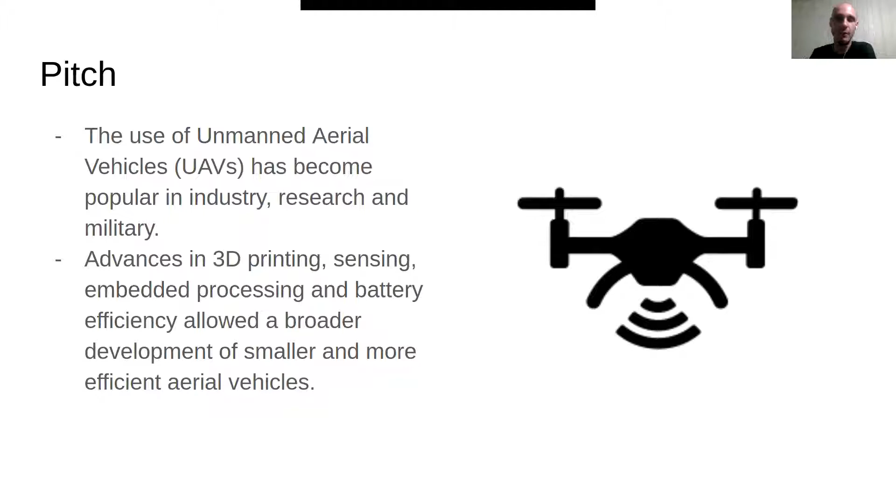The use of UAVs has become popular in industry, research, and military. Recent advances in 3D printing, sensing, embedded processing, and battery efficiency allowed a broader development of smaller and more efficient aerial vehicles. Nowadays, most UAVs are designed to operate in outdoor environments, being fitted and dependent on accurate GPS data feedback. They end up being often manually employed by some kind of external operator.

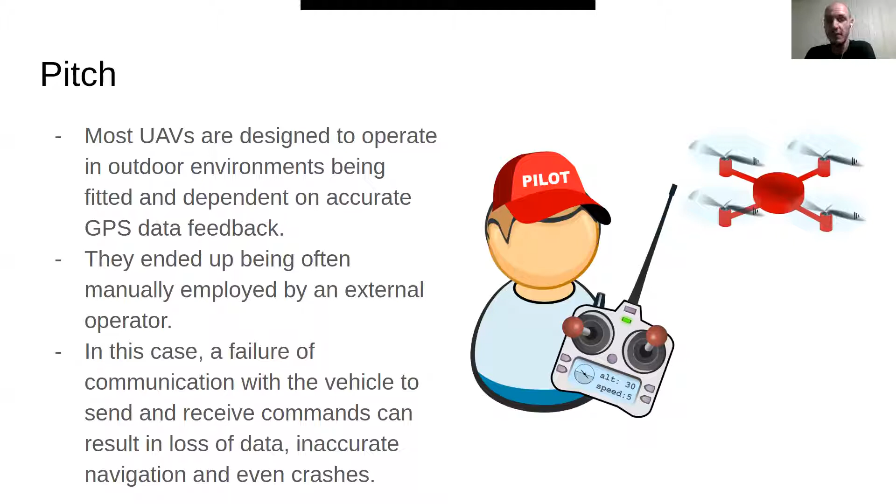In this case, a failure of communication with the vehicle to send or receive commands can result in loss of data, inaccurate navigation, and even possible crashes. In this work, we propose a visual-based UAV with embedded online intelligence capable to maintain stable flight, navigate, and locate itself in indoor environments. With our approach, there is no need for any external operator or any kind of offboard processing. We evaluate our vehicle in a real indoor environment that simulates an oil platform environment.

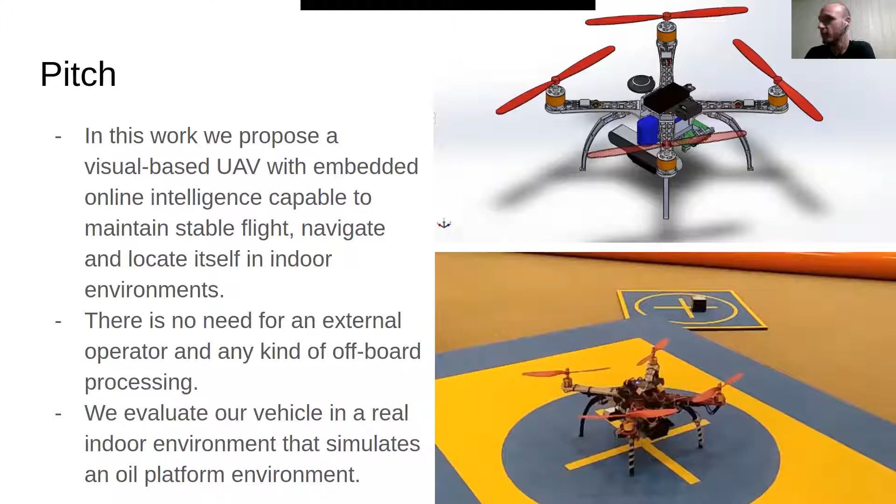So the figure in the upper right shows the vehicle in the modeling and design phase, and the figure in the down right shows the vehicle already deployed in the testing environment where we conducted the evaluation of our vehicle. The hardware setup: our vehicle was designed to have all processing embedded in it. The idea is to avoid any kind of use of external processing.

We used a quadrotor-based frame of 45 centimeters of diagonal. We use propellers of 10 inches and motors of 1000 kV. We used a Pixhawk flight controller as our main flight controller. We used the ZED stereo camera to perform the visual inertial odometry. With this camera, we get the visual pose, which we use as the main pose in our vehicle.

We also used a monocular camera to perform the detection. We put this camera pointed to the ground, so we could make all the detection of things in the ground. We also used the Jetson Nano as our onboard computer. So with this computer, we did all the processing embedded in our vehicle.

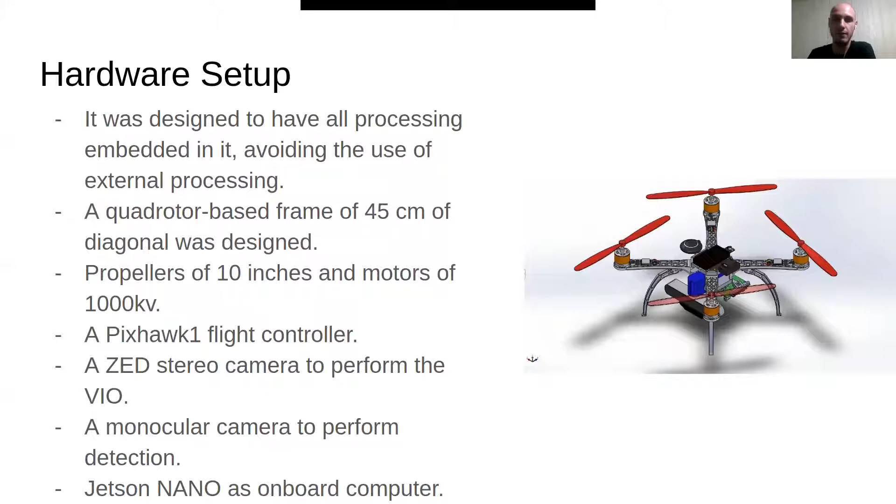The software setup: the first step of our software was to change the ArduPilot source code. ArduPilot is a framework for aerial vehicles. We compiled a firmware version of ArduPilot that uses visual pose instead of the GPS. By default, ArduCopter, that is the ArduPilot section for aerial vehicles, has the GPS feedback as the main information to define the pose. So we changed it to have the visual pose that we get from the ZED camera.

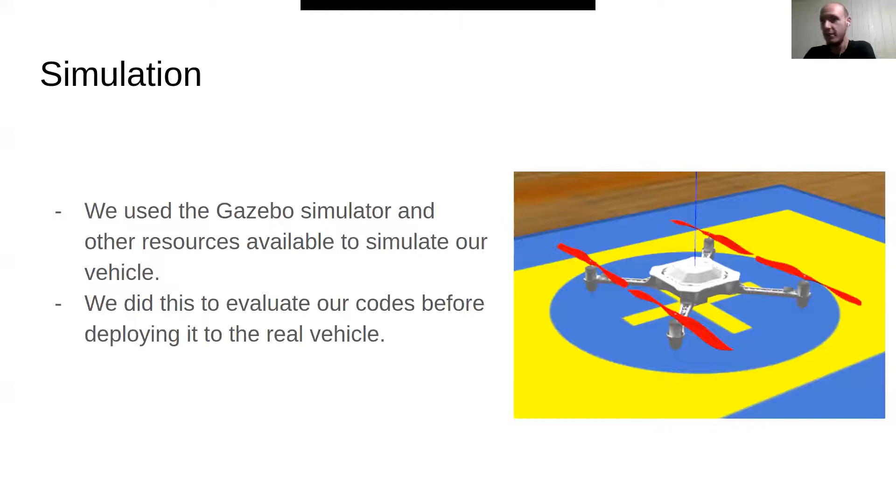We also use the Gazebo simulator and all other resources available to simulate our vehicle. The idea is that we could evaluate our code before deploying it to the vehicle, to have better results. So the figure in the right shows our vehicle in the simulated environment of the Gazebo simulator.

The testing environment: we tested our vehicle in an arena that simulates common tasks for UAVs of an oil platform. These tasks can be inspection, navigation, for example. This environment provides many challenges, like having to locate, navigate, read information from the scenario, among others. This test environment that we used, we also described it in simulation to test our vehicle. So the figure upper right shows the real testing scenario, and the figure down right shows the simulated environment in the Gazebo simulator.

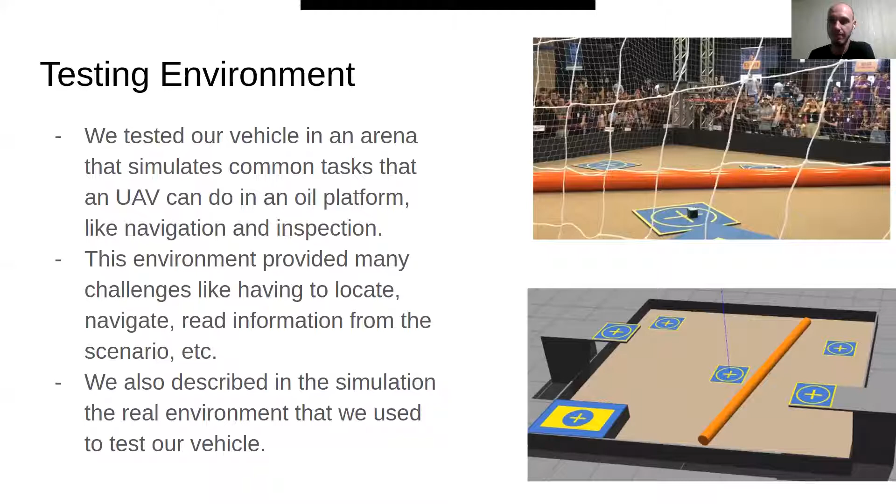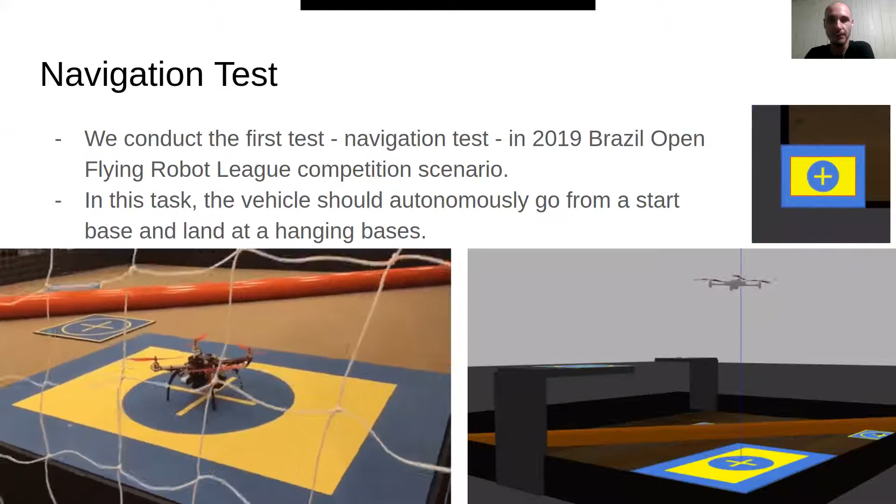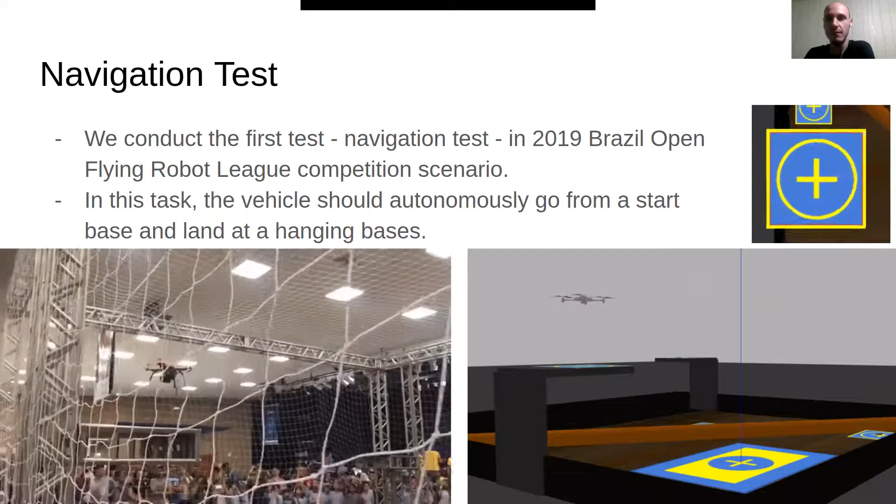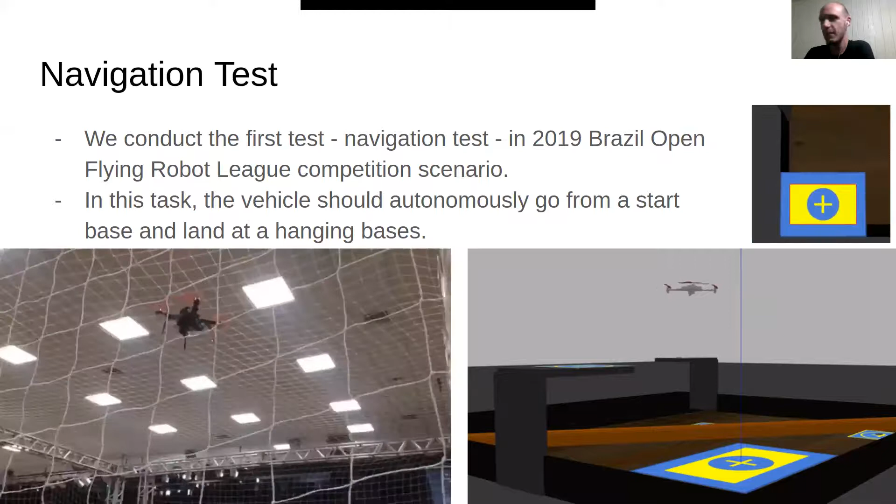We conducted 2 tests to evaluate our vehicle. The first test we called the navigation test. The idea in this test is that the vehicle should autonomously go from a starting base and land at a hanging base. This environment was the scenario of the 2019 Brazil Open Flying Robot League competition. So the GIF below in the left shows our vehicle in the real scenario performing this task. The vehicle should go from a start base in the ground to a hanging base. The figure down right shows the simulation of this test in the Gazebo simulator.

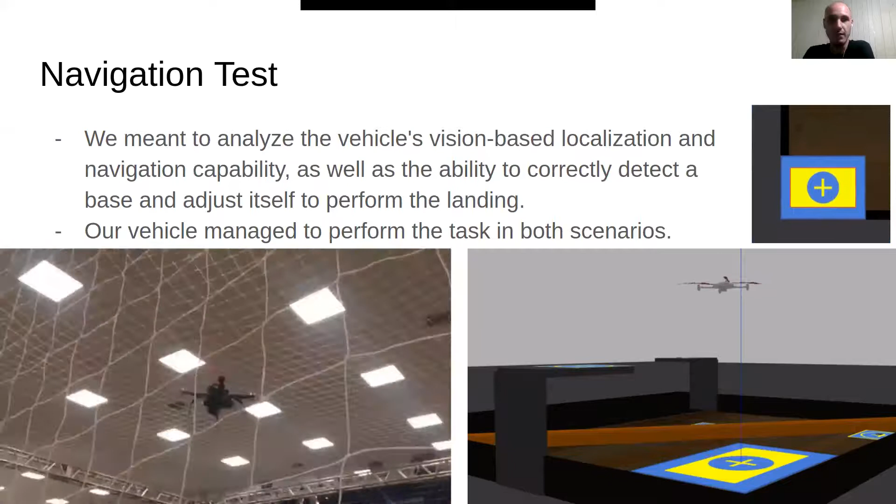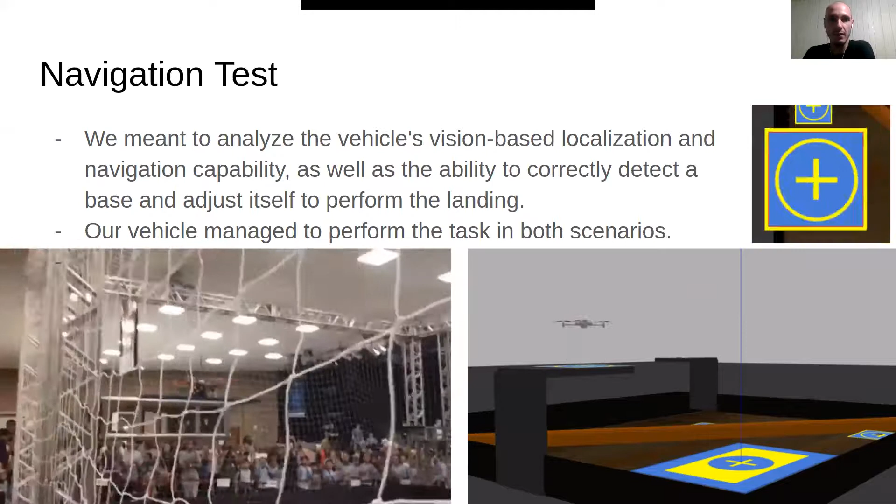The idea, like I said, is to analyze the vehicle's visual-based localization and navigation capabilities, as well as the ability to correctly detect a base and adjust itself to perform the landing. As you can see in the GIFs, our vehicle managed to perform this task in both scenarios.

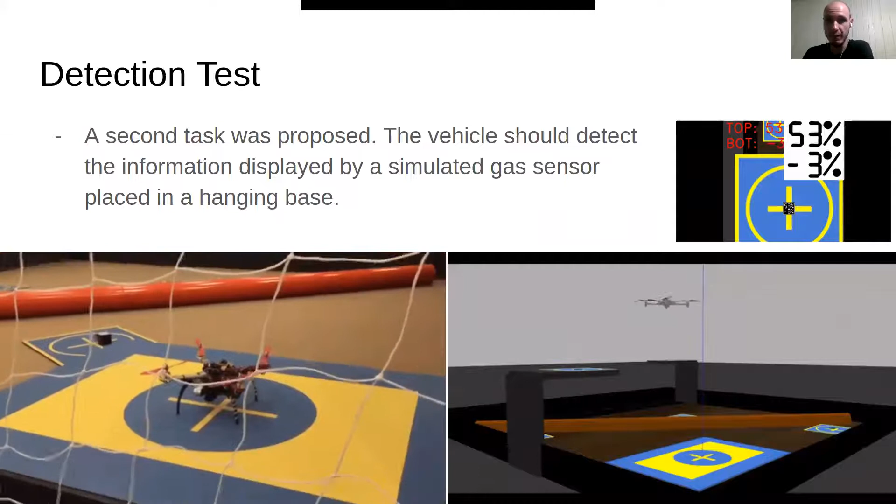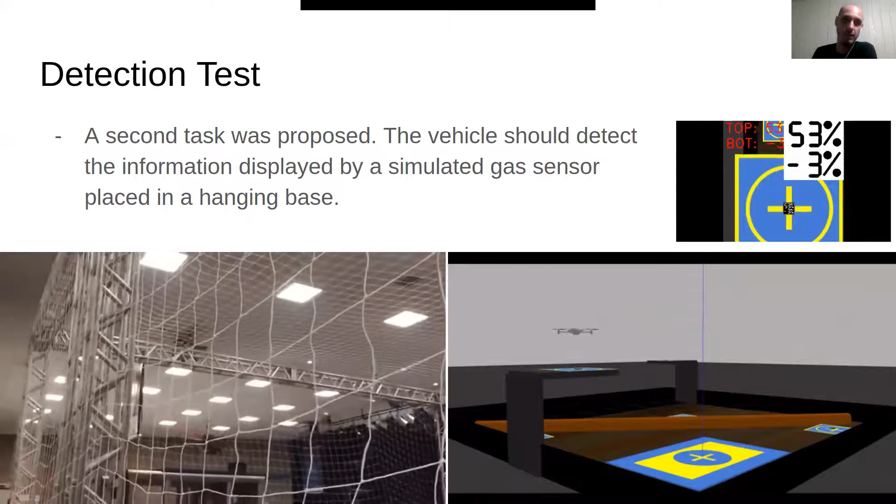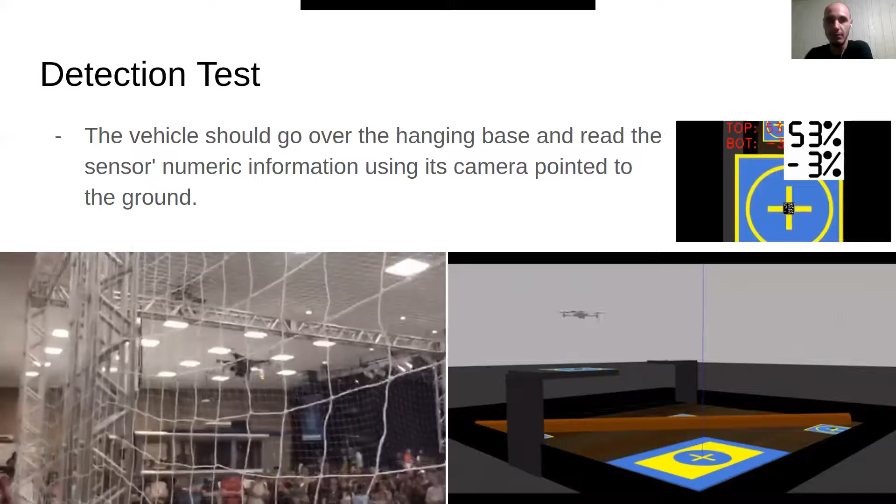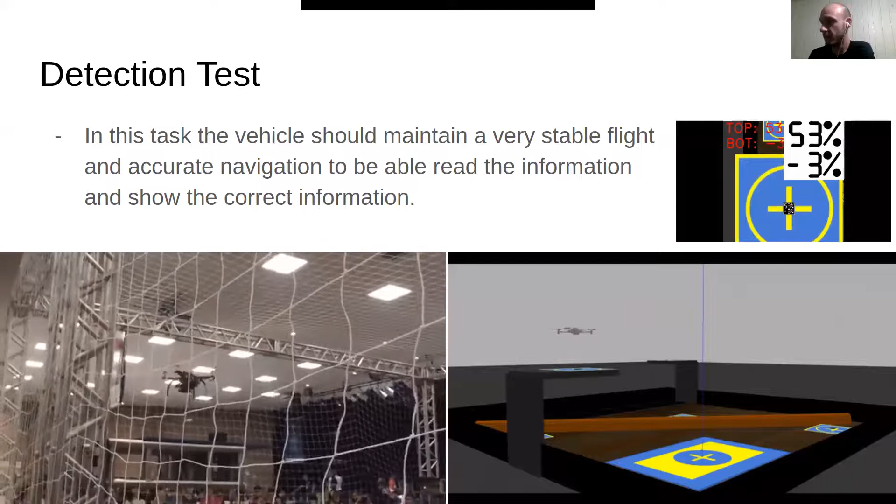We did the second test. In this test, the vehicle should detect the information displayed by a simulated gas sensor placed in a hanging base again. So the vehicle should go over the hanging base and read the sensor numeric information using its camera pointed to the ground. The idea is that the vehicle should maintain a very stable flight and accurate navigation to be able to read and show the correct information. So the figure in the down left shows the test in the real competition scenario, and the figure down right shows the simulation scenario as well.

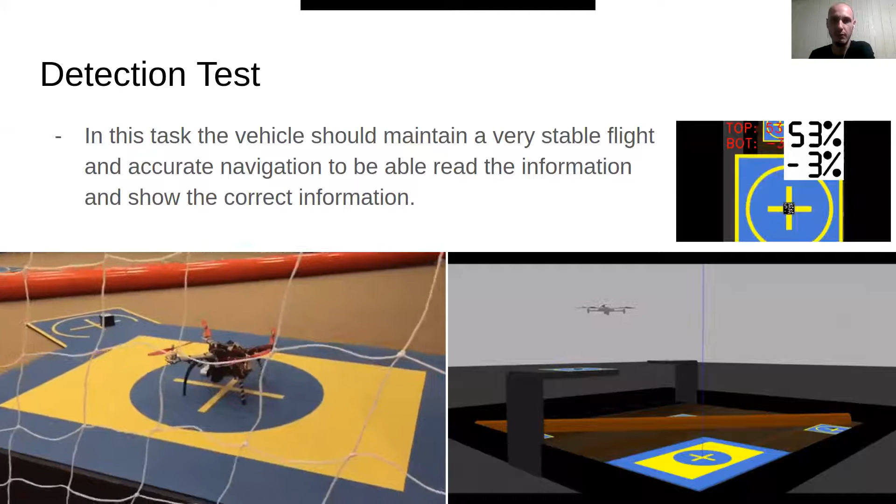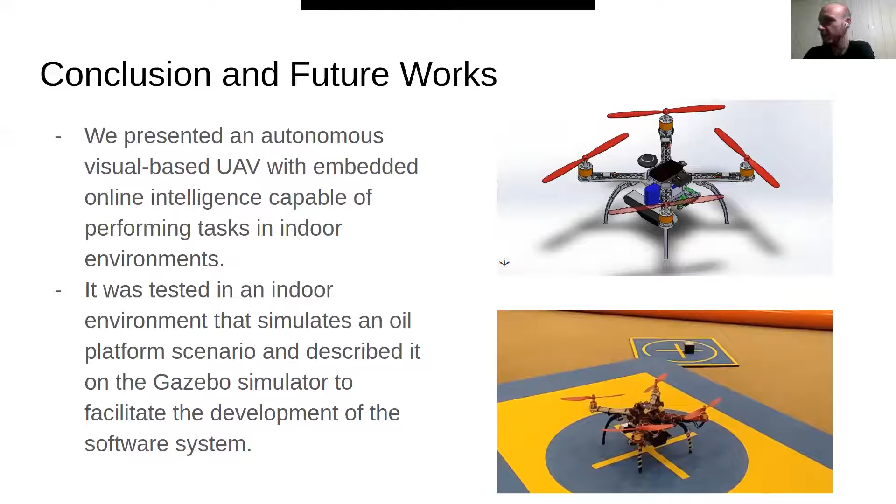So the conclusion and future works. In this work, we presented an autonomous visual-based UAV with embedded online intelligence capable of performing tasks in indoor environments. We tested it in an indoor environment that simulates an oil platform scenario and described it as well in the Gazebo simulator to facilitate the development of our software system. All the software system that we developed was based on open source frameworks like ArduPilot or MAVROS.

The system that we developed was employed to win the 2019 Brazil Open Flying Robot League, or the Desafio de Robótica Petrobras, in the 2019 Latin American Robotics Competition. We won this competition among 11 other teams from all over the nation. As future works, we aim to improve the robot's embedded system, to increase the overall processing capability and the vehicle autonomy.